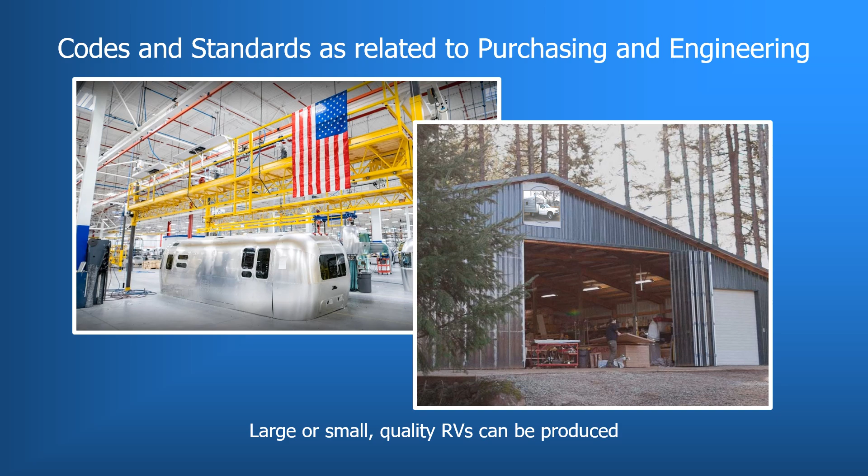Now let's get started where the whole process begins, sales. Salespeople, as a general rule, are not aware of the requirements of the codes and standards that guide our industry in manufacturing safe, dependable RVs. Not that they should be, although it would be helpful to those of us downstream in the production line. We will discuss what those codes and standards are in a bit.

So my perception is that when sales sees new components that would enhance the RVs that they sell, they push those ideas onto the people in the purchasing and engineering departments. Now, purchasing will research the options in that relevant market. Say it's propane appliances or the latest in electronic gadgets that may improve their sales. Now the engineering department will be handed the new component and they will need to evaluate it and know what is required by the codes and standards in order to safely and properly install the new component. Again, remember, this is my perception of how the process works.

Finally, production will build the new RV with the new components based on code requirements and the specific installation instructions provided with that new component. This is a very simplified explanation as to how the RV is updated with new components when manufactured. I also understand that this sequence of events in the production process will vary widely between the larger and smaller manufacturers. However, any individual involved in design, purchasing, planning, and production of RVs should have a basic understanding of the codes and standards that we build the RVs to.

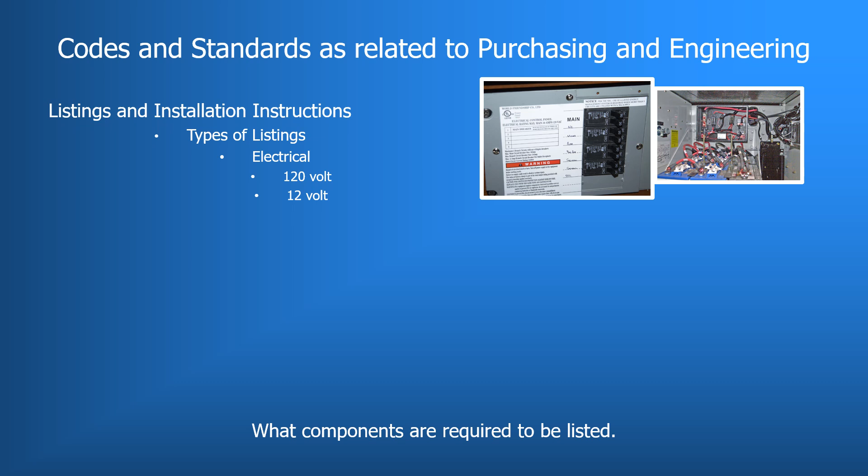UL and other listing agencies list many other products, including specific components for the 12-volt electrical systems. But as a purchasing agent, it should be noted that in the 12-volt electrical system, not everything needs to be listed. However, there are items such as light switches that need to be rated for the capacities but do not need a full listing.

Now, for gas and fuel burning appliances and equipment, there are several agencies that provide these listings. In general, it's important to remember that almost everything involved in a propane or a natural gas system will need to be listed, and they need to be specifically listed as fuel burning appliances and equipment for use in an RV.

Now, this is also true for the components of the propane and fuel supply equipment. The hoses and fittings and the regulators that supply gas to the appliances must also be listed. Again, UL, Underwriters Laboratories, also covers these items, but there are other agencies that list propane equipment and their components.

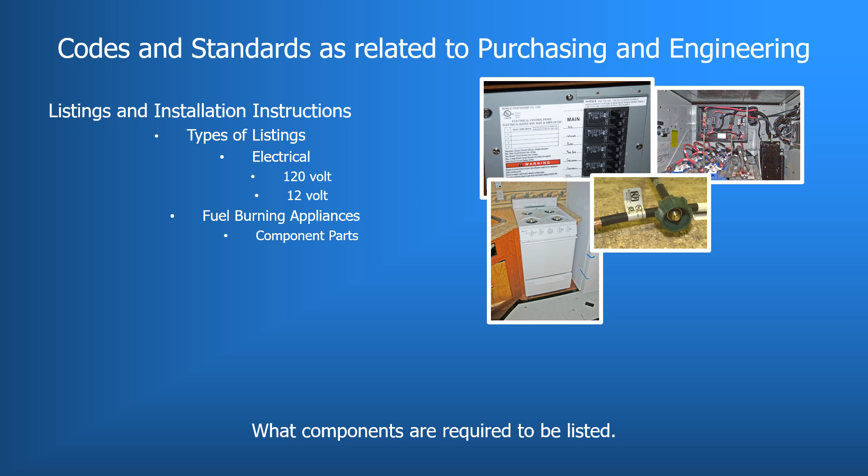Also, listed assemblies that are purchased, which are comprised of 2 or more components, will have a duration that the listing is valid for. Here's an example of a distribution manifold and hoses listed as an assembly. The important point here is to remember that there is a life to a listed assembly. This is typically a 3 to 5 year period. At that time, the listing needs to be reevaluated and the listing updated as required by the agency.

If the listing lapses and the RVIA inspection staff finds an out-of-date listed assembly, they will cite it as a deviation while inspecting the assembly line.

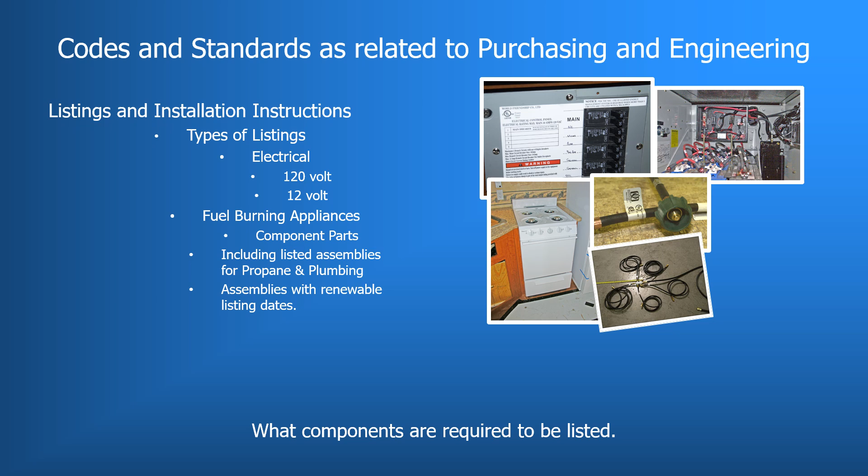So just remember that almost all components of the 120-volt electrical system, the propane system, and additionally, the plumbing system will require listings. Again, there are several agencies providing listing services for plumbing components. Also, the majority of components in both the water supply side and the drainage side of plumbing do need to be listed.

As with many of the components seen here in plumbing, fuel systems, and electrical, specific listings may also be required. For example, piping involved with the drainage system must be listed DWV, or drain, waste, and vent. Piping for the water supply must be listed as non-toxic, and so on.

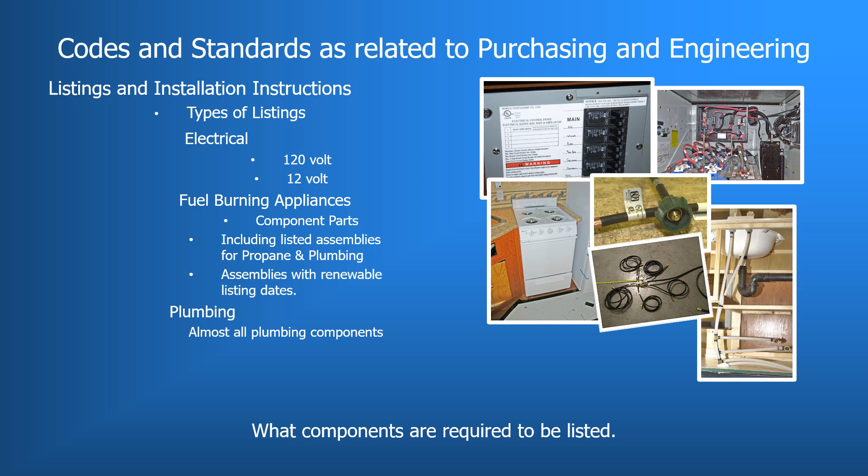Now, when it comes to fire life safety, we as inspectors concentrate on several items. When it comes to the listings, we are looking for specific listings for carbon monoxide, smoke, and propane detectors. For example, smoke detectors need to be listed to UL 217 and specifically suitable for use in recreational vehicles.

If you purchase a smoke detector that is listed UL 217 at a Lowe's or a Home Depot, but it does not have the additional language for use in recreational vehicles, it is not the correct smoke detector and it will be cited as a deviation during an RVIA inspection. UL 217 does have at least 2 variations, one being for residential use and the other specifically for RVs.

Propane detectors need to be listed under the UL 1484 standard. It also needs to contain the language that it is specifically for use in RVs. And finally, carbon monoxide or CO detectors must be listed to UL 2034. The common thread between all these safety devices is that they must indicate that they are suitable for use in recreational vehicles or use similar language.

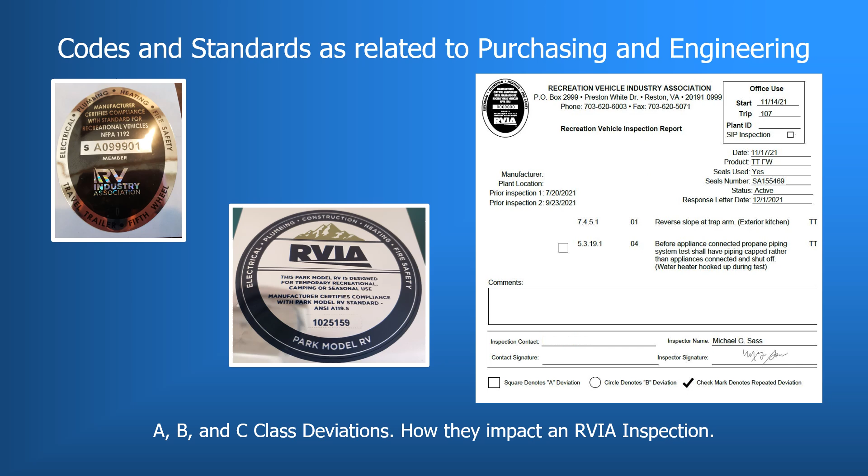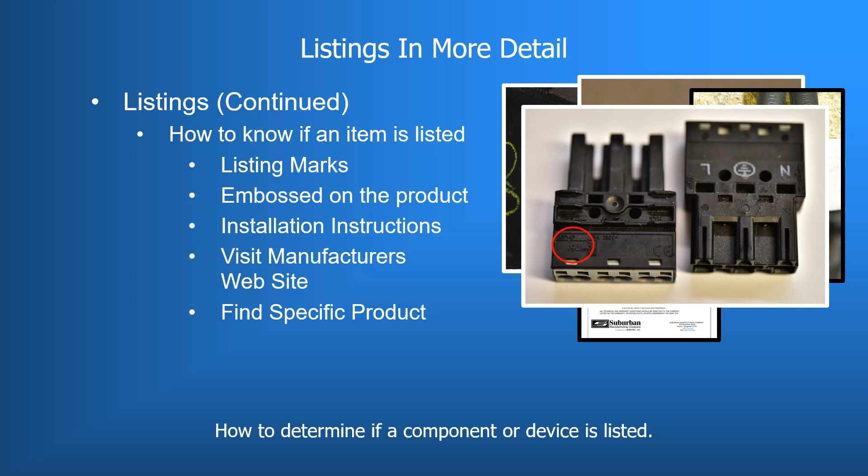The backward UR is a UL mark basically meaning that it has been partially listed and can be used as a part of a listed product. For example, a multi-wire terminal or a quick connect having a backward UR mark is used as part of a listed inverter or converter. The quick connect cannot be used independently to connect 120 volt wiring.

Then, when necessary, going to the web may be your last resort. There, you can visit the website of the component manufacturer and look into the proper listing information you are after. Remember, however, that most listings will require a physical marking on the component or device. Research the product at their specific website. Look for the product specifications and always remember that many products need to be marked on the component itself and that it requires additional markings such as for use in recreational or land vehicles.

In many cases, the marking that is placed on the component will also display the standard that it was listed to. Here are some examples. Heat ducting needs to be either a class 0 or class 1 and is clearly marked here on this insulated ducting. At the bottom of the photo, it states the standard to which it was evaluated, UL standard 181. Detectors have all different standards to which they are evaluated, and again, they all need to state that they are intended for use in RVs.

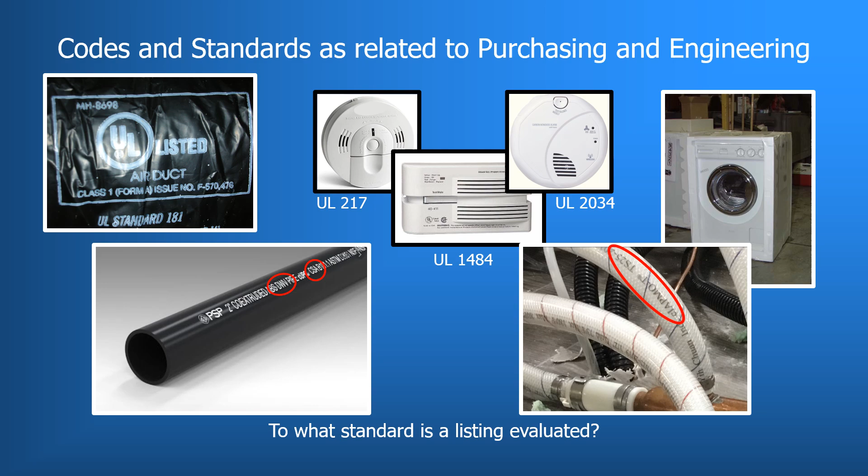Plumbing components all need listings from piping and hose to fixtures and fittings. Here we see an example of ABS drain pipe which has the listing mark on the pipe with the specific designation of DWV, drain, waste, and vent. And the list continues, many more than we have time to discuss here today. Here is a water supply connection listed properly as non-toxic and able to distribute water at all temperatures up to 180 degrees Fahrenheit. This is what the TS25 marking indicates.

Listed components and devices, as mentioned earlier, do not necessarily need to indicate which standard they are evaluated to, but simply need to show the RVIA recognized listing agency mark. One example would be fire extinguishers, which need to be listed and labeled to UL 711.

Inspectors will look for the listing agency mark, but are more interested here that it is the correct type of fire extinguisher. As of July 2021, the RV industry adopted the use of 1A 10BC fire extinguishers. This is a change from the past 20 plus years, when a 5BC or a 10BC extinguisher was required depending on the type of RV in question.

For the most part, the RVIA inspection staff will ask for installation instructions when a new product or appliance is introduced to the RV production line that they are inspecting. As mentioned earlier, everyone needs to be familiar with these instructions, including the inspectors from the standards department here at RVIA. We will ask from time to time to see the installation instructions for a particular appliance. We are mainly interested in comparing the installation instructions to the appliances we see already installed on the production line.

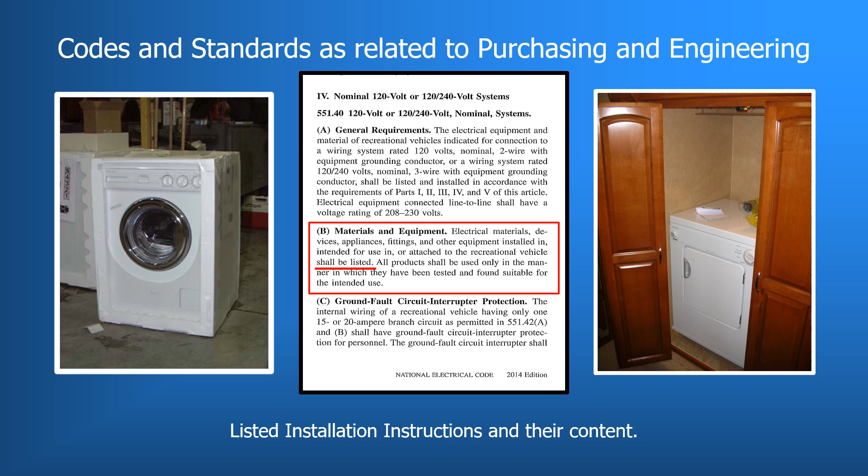In installation instructions, as well as in code language, words matter. Words like shall, must, required, and so on are all statements mandating something specific to be done or occur. Words like recommended, may, or could are viewed as suggestions to the statement and don't have to be done. They are not required.

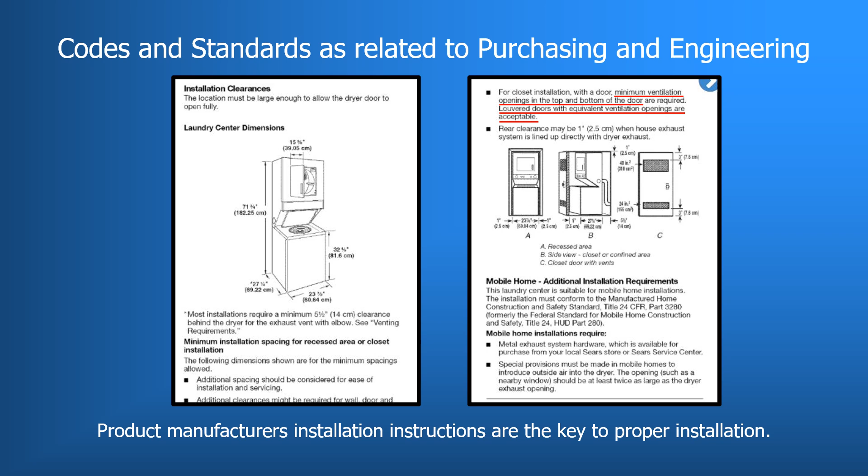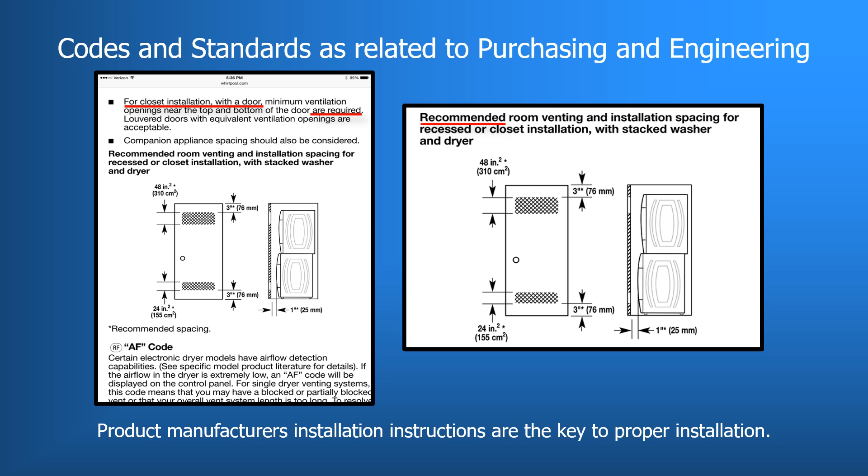However, if ventilation is mentioned in the installation instructions, ignoring or severely limiting the volume of ventilation could lead to poor dryer performance and customers not being happy with their RV. When installation instructions mandate that a specific amount of ventilation be provided, then the size of the openings in the door will be calculated by the inspection staff to verify again that it meets the requirements of the installation instructions.

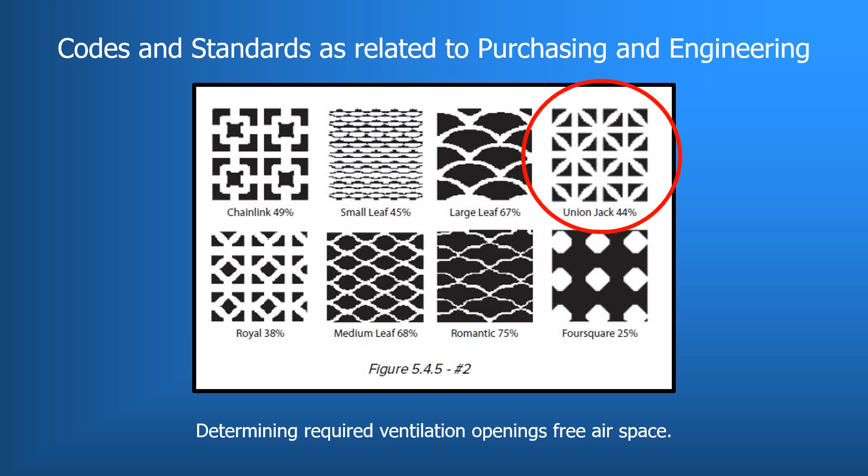Again, for those of you not familiar with the RVIA inspection process, this is a relatively common practice. Many times, it is simply a function of slats for ventilation. Then, the number of openings between slats multiplied by the square inches of each of the openings to determine if there is enough ventilation.

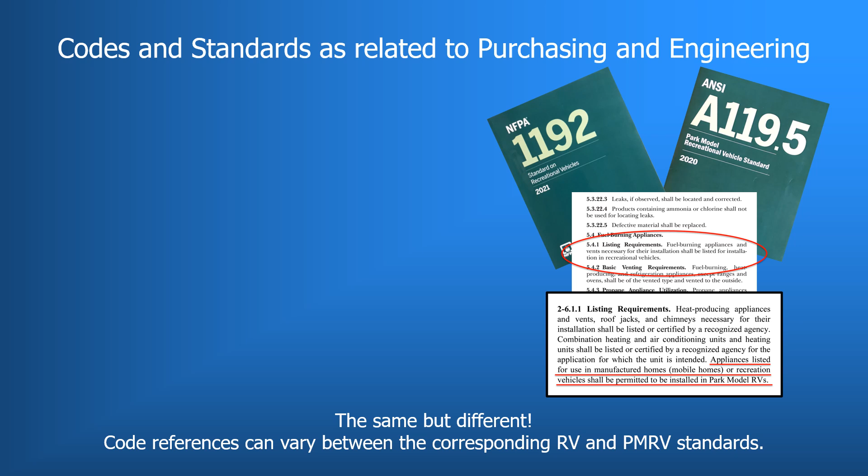This requirement is found in both RV and PMRV standards, but with slightly different language. So in this case, the same basic requirement remains the same, except that fuel burning appliances listed for manufactured homes, mobile homes, are permitted to be used in park model RVs, but they are not listed to be installed in a standard RV. Now, standard RV appliances are permitted to be in park model RVs.

This is seen underlined in red below in the 2-6.1.1 code reference from the ANSI A119.5 standard on park model RVs. This can be important to manufacturers of park models as it expands the type and or style of ovens and cooktops available for park model RVs.

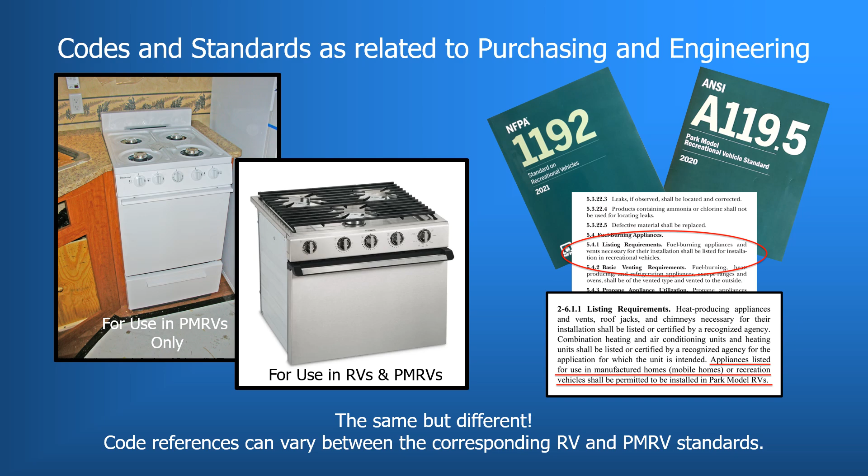So, keeping in mind that for the sake of time, and even though I know you love listening to my voice, we will just concentrate on the RV standard and the listing requirements found there.

So, keeping with specific requirements for listings, let's hit some that are common in the 120 volt electrical systems under the National Electrical Code. A specific UL 458 listing is required for inverters and converters. It may not state UL 458 on the device or in the installation instructions, however. It may also just say, for use in recreational vehicles or intended for land vehicles. All are acceptable and meet the requirements of UL 458.

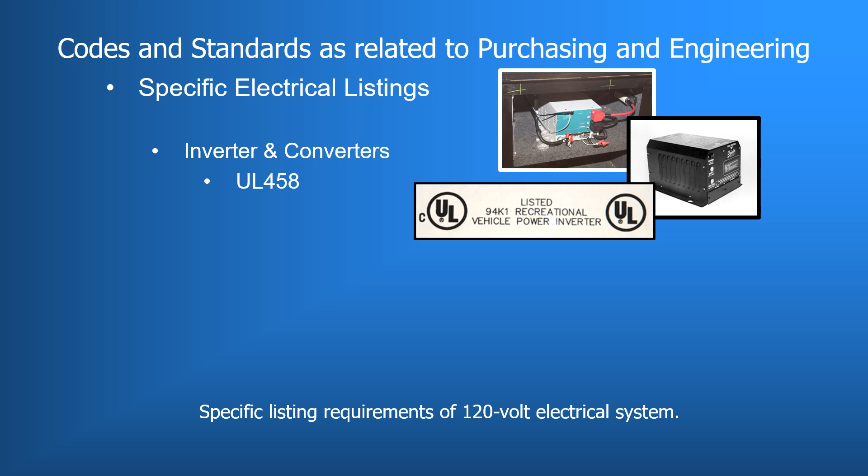Inspectors that do not find any of the three markings on the device or its package will cite it as need to provide evidence of listing for UL 458. When RVIA inspectors inspect RVs that have an onboard generator as a secondary electrical power source, they often will also be equipped with an automatic transfer switch, or an ATS. These also require a specific listing, which is also to be printed on the device, UL 1008.

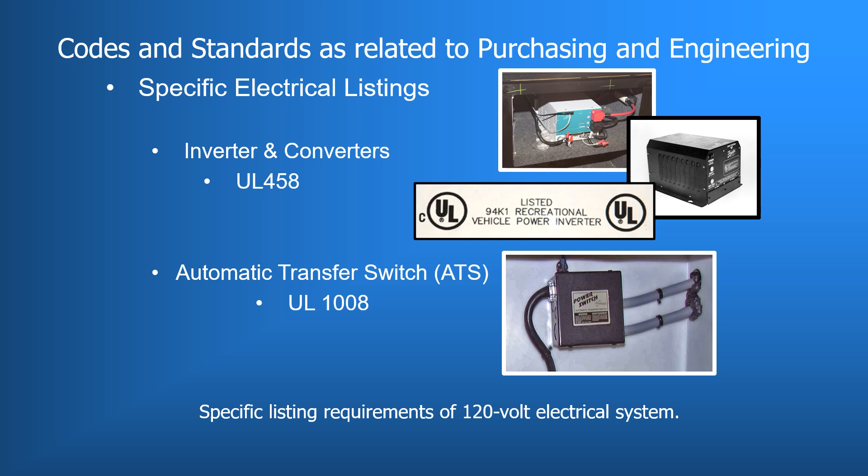Another issue that crops up from time to time is the use of the proper wiring within the 120 volt electrical system. Wires or conductors, also referred to generically as Romex, which is a brand name, it is actually a non-metallic sheath cable that comes in many configurations. These configurations vary in the size of the wire, the type of wire material, the physical construction of the wire, and also in different insulations and different sheathings. And among others, and the most important to us today, is what their intended use is under their individual listings.

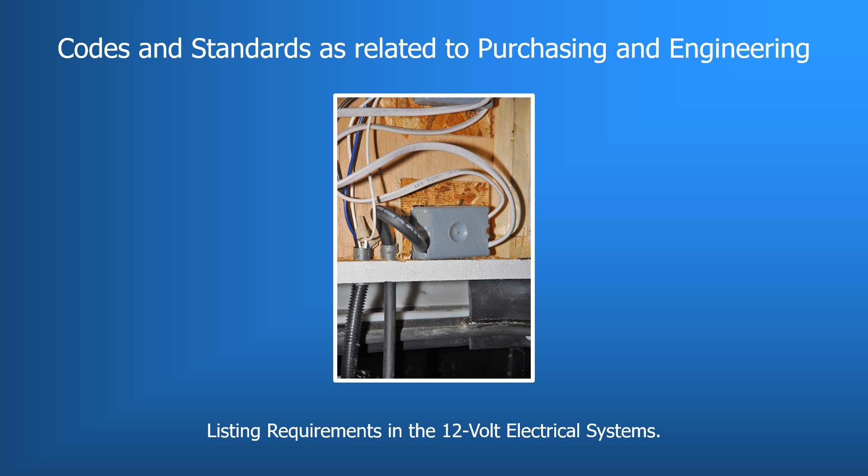Listings in this case assure us that the size of the wire is adequate to handle the amps the cable was designed to carry. It also assures us that the proper insulation is used on the copper conductors and that the sheathing is the correct type for its intended purpose. The takeaway here being that with the use of listed components such as Romex, we can be assured that the components are built properly and are safe to use for their intended purpose.

SJ cable is intended for both external use and rough usage because it is a stranded wire and has a special sheathing that is much more resilient than the standard non-metallic sheathing. The problem that shows up occasionally is that the SJ cable is being used as fixed in place wiring that it is not intended for. Since it is constructed of a stranded wire, much more flexibility is provided in the cable. It is used for RV slide outs and other movable components of an RV that require the flexibility. So it cannot be used for fixed in place applications. That is what Romex cable is for.

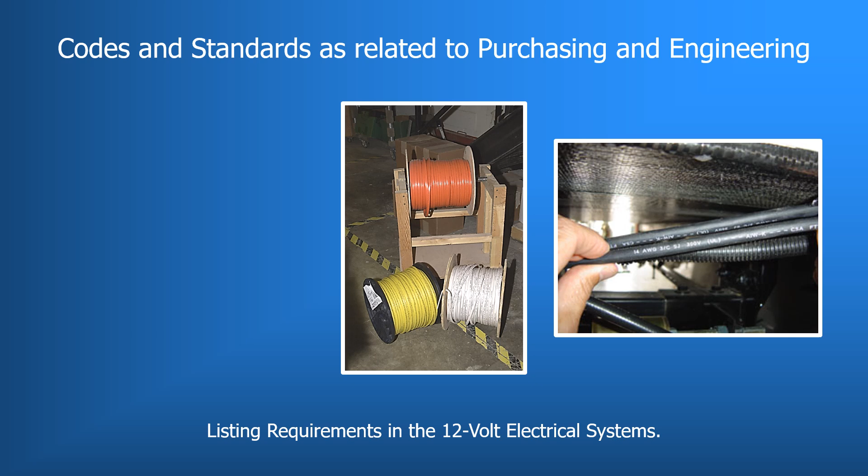As mentioned earlier, Romex is a solid copper wire, which is not flexible and does not hold up well under repeated bending. Now granted, the SJ cable would be fine in a fixed in place situation if it was listed providing that option to do both, but it is not. So even though it would definitely be safe and durable, we would cite it as a deviation from the code. And additionally, the SJ cable is considerably more expensive than Romex, so it is cheaper to transition from SJ to Romex as soon as any moving components are not present any longer.

As mentioned earlier, the configuration of a 120 volt electrical cable varies in many ways. For us today, the intended use of the cable under this listing is what we are concerned with. So again, by manufacturing RVs and utilizing the correct components in the proper manner, we as an industry avoid potential lawsuits. Liability can be shifted away from the RV manufacturer because everything was installed as intended, used for the correct application based on its listing and its intended use, and in all cases by following the installation instructions of all components installed in our RVs.

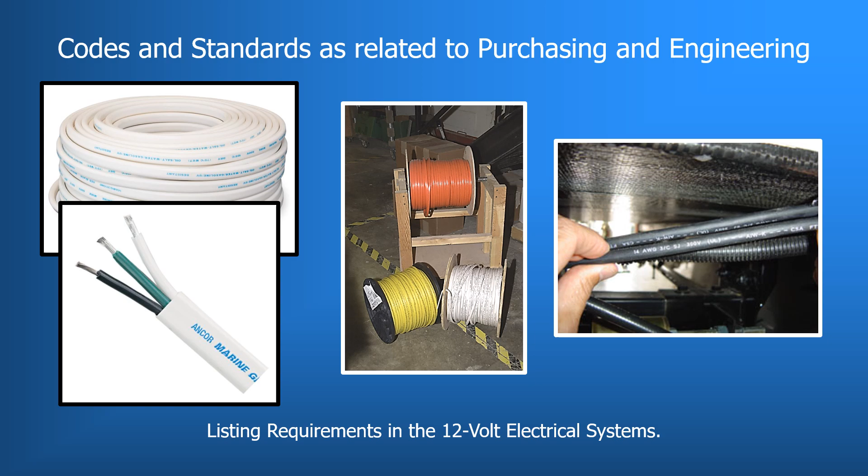Importing wire from a new source or purchasing it because of a better pricing can be risky when it comes to getting truly listed wire. Again, as with the 120 volt wiring, listed wiring assures us in the 12 volt system that we have the correct circular mil area, which is basically the diameter of the wire, that it can carry the designed amp load along with the other considerations of proper insulation and temperature ratings.

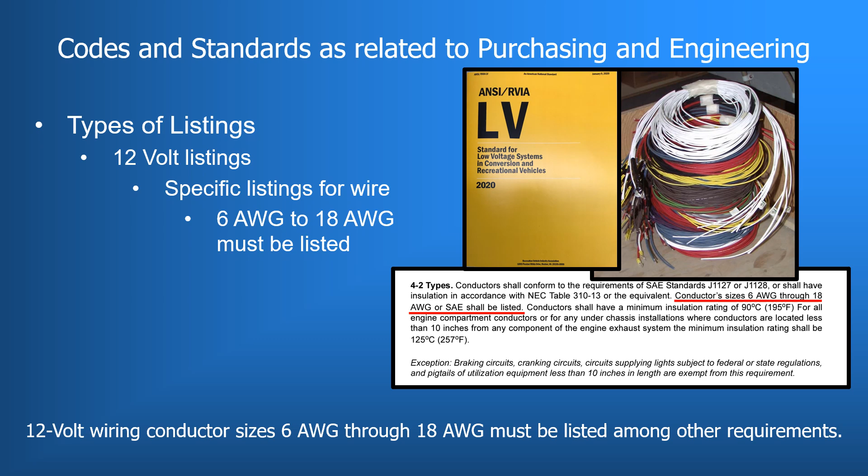For those that have not read the 12 volt standard, please do so. It is a very small document and contains information that should be kept in the back of your mind while designing and or purchasing components for your company.

12 volt lighting today in most cases is pretty simple with the increased use of LED lighting. Most lighting needs to be listed if it is over 4 watts and used on an interior area of the RV, including exterior storage areas. Fixtures rated 4 watts or less, or lamps at 1.2 watts or less, need not be listed.

However, in the past few years, the number of fixtures less than 4 watts that are being listed has increased dramatically. But again, I encourage all involved here today to read this 12 volt standard. There are several caveats to the low volt lighting installation that do require knowledge of fixtures, clearances, pigtail lengths, and others.

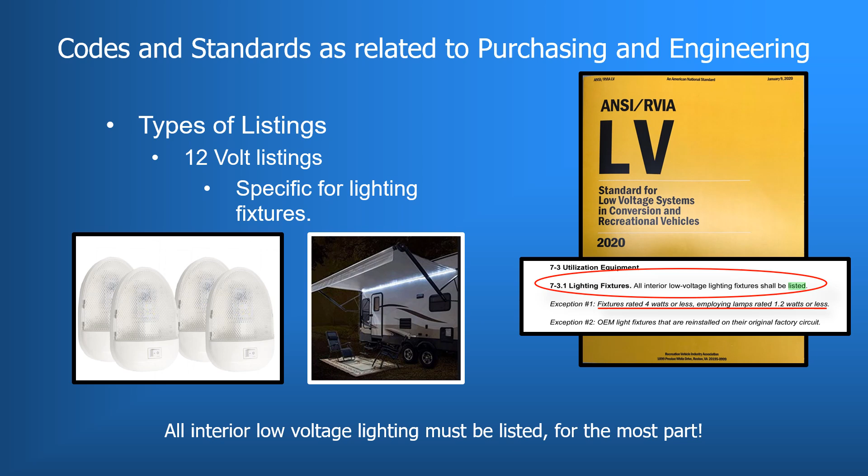Just be aware that both those in the purchasing and in the engineering should reference Chapter 5 of the 1192 or Chapter 2 of the 1195 handbooks on the PMRVs when considering any fuel burning appliances or equipment, and then compare the appropriate codes to their installations provided through the listing.

The primary takeaway here is that there are many cooktops that are available on the market that are listed specifically for use in RVs. So only install or provide listed fuel burning equipment in all models that you produce that are intended and listed specifically for use in RVs.

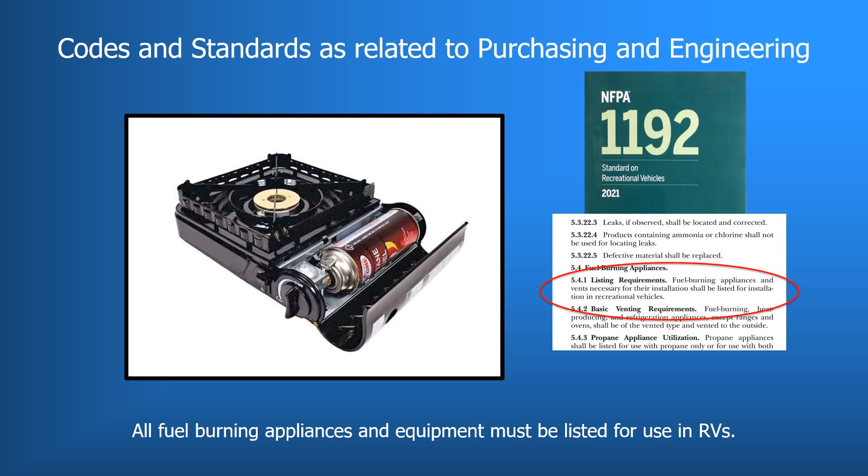As with all listed components, fuel burning appliances and equipment are supplied with installation instructions and use instructions. The safe installation of these items is truly a safety concern and must be done correctly.

My experience in the industry has shown that our manufacturing members do a good job of following the installation instruction requirements. Sure, there have been and will be the rare occasion when something is done incorrectly, but we must keep these mistakes to a minimum no matter how busy our production levels may be or how much employee turnover there may be at any given time.

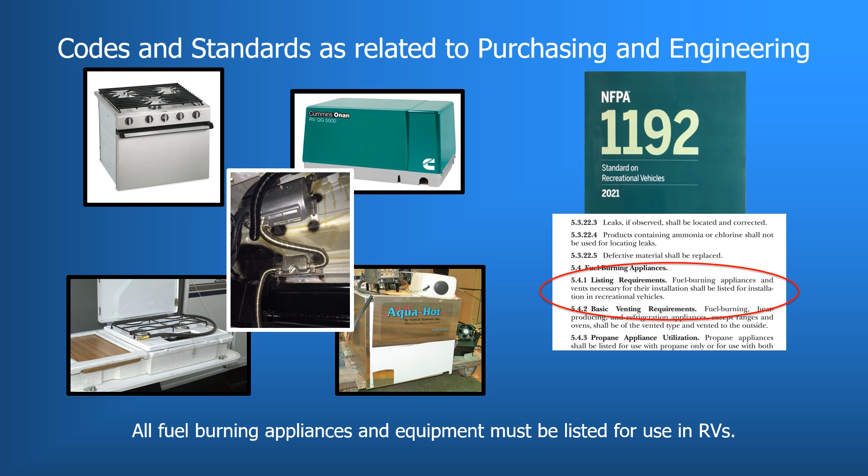Between the installation instructions and the full understanding of Chapter 5 and fuel burning appliances and equipment, the purchasing and engineering departments can provide these components and others to the production line personnel for installation of the components that will be understood by all, installed to code and according to the installation instructions.

For plumbing, there are several listing marks that you may be familiar with. IAPMO, the International Association of Plumbing and Mechanical Officials, is probably the most common. Second may be the National Sanitation Foundation. These, along with several other RVIA recognized listing agencies, provide plumbing component listings.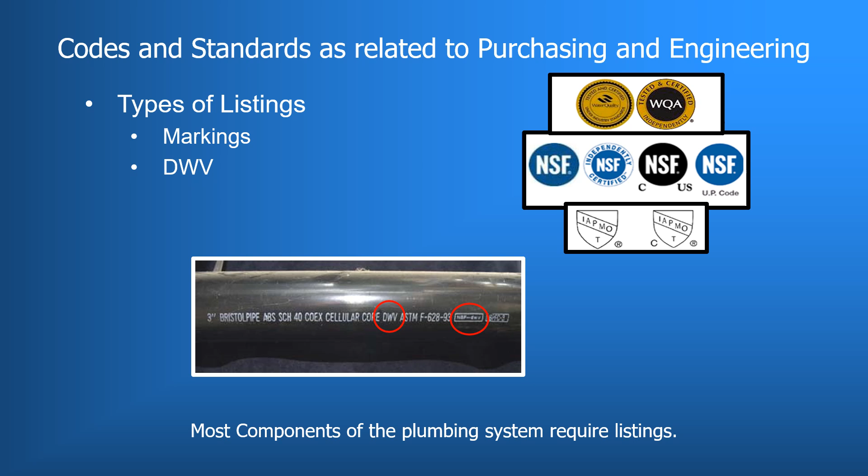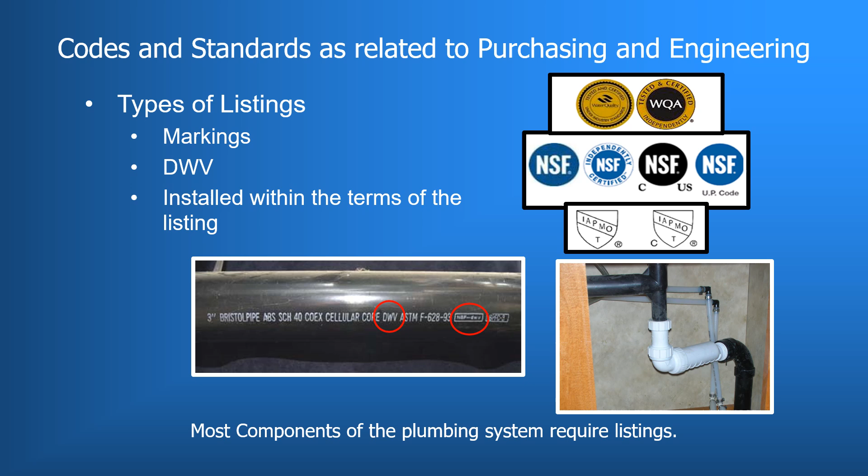As with any listed component in plumbing, the understanding and use of the installation instructions is very important. Here, a waterless trap is installed in one of several configurations allowed by the listing installation instructions. In this case, the installation instructions state that the ribs seen on the underside of this waterless trap be installed in that position when the trap is installed horizontally. This is just one simple example of installing this component according to its listed installation instructions.

Now, there are three other issues that show up from time to time we cite as deviations from the standard. It's not like these plumbing components are poorly made. It is simply because they are not listed. Listings for all items are evaluations to a standard, and with sinks, as seen here, one point of evaluation is proper drainage. Sinks have several other requirements for their listing depending on the specific style and features of the sink. The point is, if they are not listed, they will be cited by our inspection staff.

Here, we have a solid surface double basin sink that was constructed by the RV manufacturer. Now that can be okay, and we accept these solid surface sinks if they have been evaluated and listed by a third-party listing agency recognized by RVIA.

The sink seen here can be purchased at any hardware store or Tractor Supply outlet. The problem is it's just a bucket that needs to be turned into a functioning sink. This obviously is not a listed plumbing component and not acceptable under the 1192 standard for RVs. To date, I have not seen one of our manufacturing members attempt to send this version of the bucket sink to be listed. I wonder why that is. Additionally, remember that if this is being done for that special order, and even if the bucket is supplied by the owner of this RV, if found during an inspection, it will be cited as a deviation from the standard.

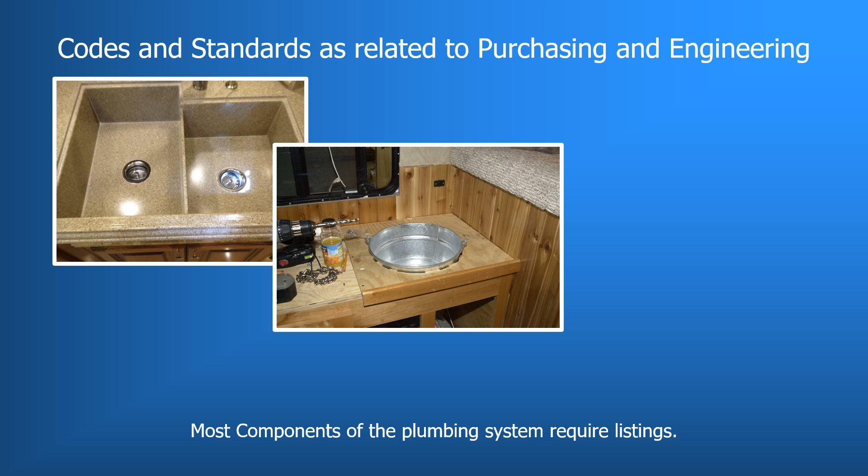The last sink issue is concerning sinks that have the appearance of being listed. They have good finishes, they have the proper drainage, and from the sales department, they say it looks perfect and meets the design requirements of the kitchen or the bath area they are designing. But not being listed is often a function of the location in which it was manufactured. This being a sink with a copper hand-peened look seems to be very popular and has kept showing up over the years. These copper sinks look very professional and well built. But most that I have seen are not made in the United States and they are not listed.

So when researching online to find sinks or any other plumbing component, make sure they meet the design requirements, but also always verify that they are listed. Statements like meets all requirements of NSF or IAPMO standards does not indicate that the item is listed. It does not prove that it was even evaluated to a specific standard unless it is accompanied by a recognized listing mark. Just stating that it meets a specific standard is the equivalent to a CE mark to manufacturers here in the United States. And as discussed earlier, we as manufacturers in the United States do not self-certify our products. Independent third-party listing agencies provide that service.

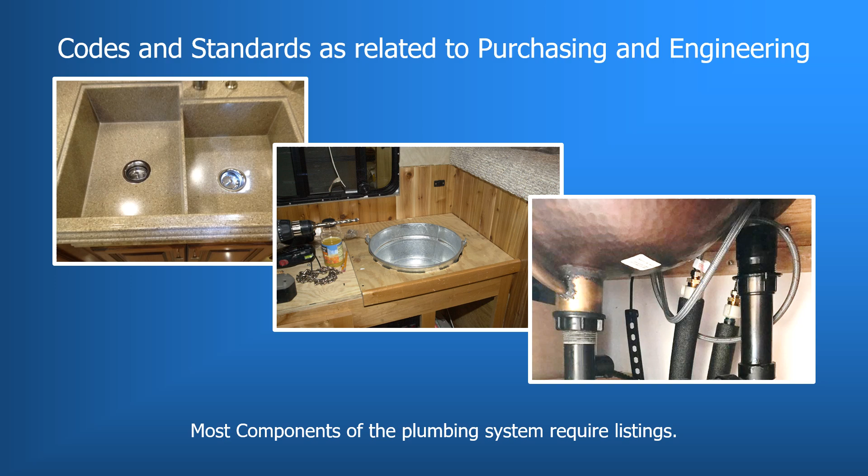In most cases, engineering and production personnel will need to be the most familiar with the installation requirements for smoke detectors. Sales and purchasing should still be aware of the installation requirements simply to assure that they will work in the specific models of RVs they wish to install them in. Sales personnel are very well versed in the models they are selling, so when they understand the installation requirements of any product, it helps promote the coordination of all listed products downstream through engineering and production. Sales then can be the first line of defense in identifying the properly listed products and save time in purchasing and time in engineering during the design process. That will assure that the production facilities are supplied with a component that is properly vetted prior to arriving for production.

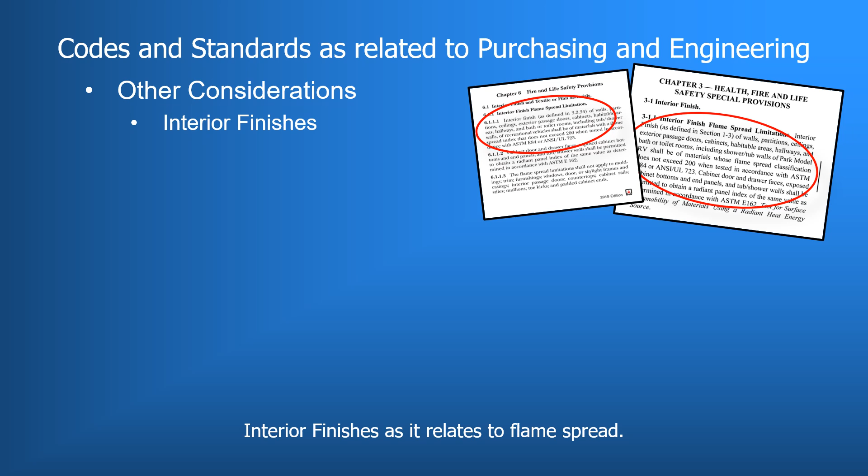Again, these labeling requirements are also needed to be marked on materials used on interior finishes. This generally can be the interior paneling material. It should be noted that in cutting panelings to the required sizes, not all smaller segments of the full sheet of paneling will have the required markings present as they were cut off to the panel's specific size.

For any production personnel trying to verify that they are properly marked and labeled, look at the full panel found with the bundle they were delivered in. There you may find the required information. It will be printed on the back side of a full sheet of panel or on a sticker as seen here, or found on a label attached to the bundle of paneling.

Interior materials must carry a 200 flame spread rating or less for all towable RVs under ASTM E84 or UL 723. This information is circled here on the label found on the back of a sheet of interior paneling. Remember, there are other standards that pertain to flame spread depending on the materials involved.

For example, this could be wood finishes applied to cabinets and doors, or proper rating on fabric material used in tent campers. This information could be marked on the container of the cabinet finish or on the material itself, such as tent material, with a tag sewn into the fabric.

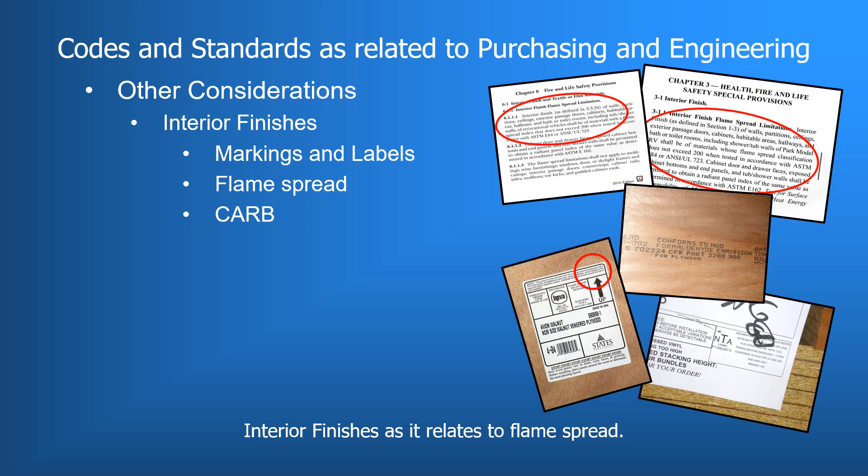Another example is paneling. It is not only the flame spread requirement, but now is also required to meet the CARB requirements for formaldehyde emissions that must be printed on the back of paneling as seen here. CARB, for those new to the industry, is the California Air Resources Board. The good thing is that currently the industry has worked through most of these issues. I have not seen paneling that isn't up to speed with these current requirements from CARB with labeling in some time, and for right now, we should be good.

But don't go getting too comfortable. As an industry, we are constantly being brought new materials from many different sources in different parts of the world. So always check for these flame spread requirements found in the 1192 standard for RVs under Chapter 6 and Chapter 3 of the A119.5 standard on park models. Both are the fire life safety chapters.

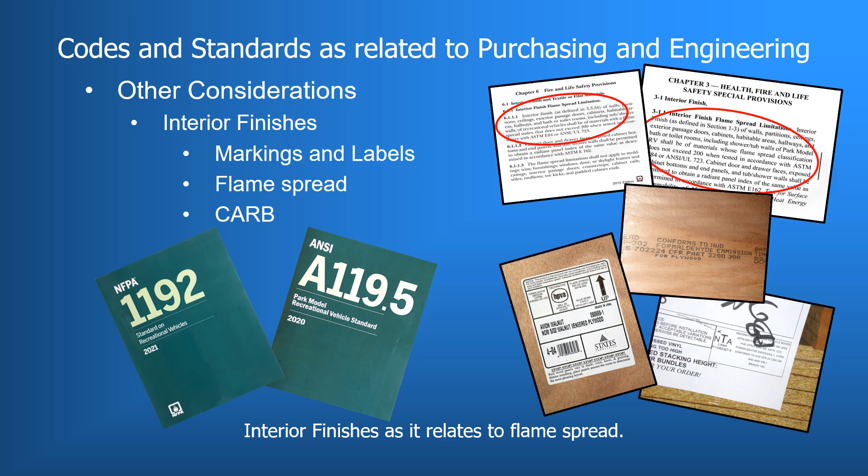Another consideration is the types of glass or glazing installed in RV products. Here again, the glazing requirements are the same for the RVs under the 1192 standard as they are for park models under the A119.5 standard. They both mandate that if glass or mirror have an area of 431 square inches or more, they must have safety glass or have a safety backing.

The required marking on glass components of an RV detailing that it is safety glass can be etched into the glass, or it can have a safety backing with labels attached to the back, which is the case for most mirrors found in RVs.

Okay, now to summarize this presentation, the sales and purchasing personnel lead this process and really should be well educated on the materials and equipment they are asking to be installed in our RV products. This includes knowing the installation requirements of the product listing. This will help everyone downstream in engineering and throughout the production process. Engineering will take the components and evaluate and, when possible, integrate them into the new model RVs.